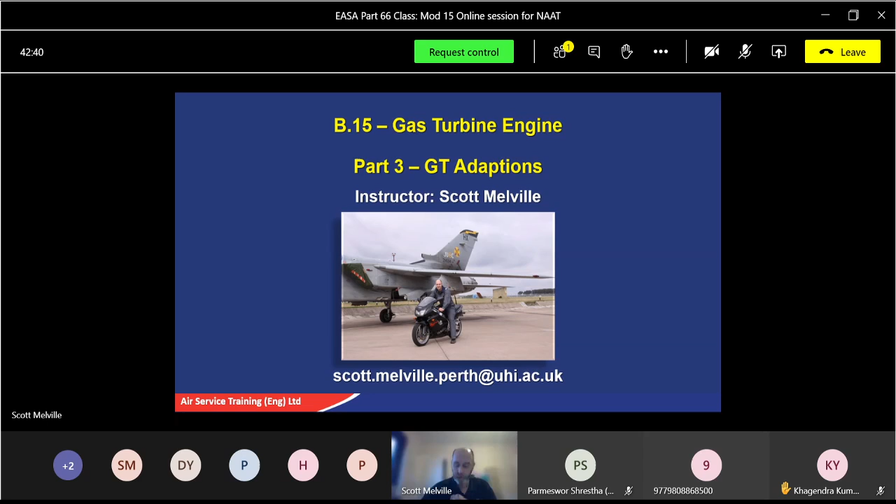I don't need that anymore, we've done all those, that's just the normal start. Right, contents - what we're looking at more in depth is turboprop engines, general gas turbine engine control, overspeed safety devices, turbo shaft engines, which are pretty much similar to turboprops, and reduction gearing.

Again, we've touched on this already in module 17, so it's a bit of a recap - we're sort of going back the way now, so some of this will be a bit more of what we've seen already. Helicopter control systems - why are we teaching helicopter control systems? Well, most of them have gas turbine engines, so you need to know a little bit of the basics about helicopter control systems.

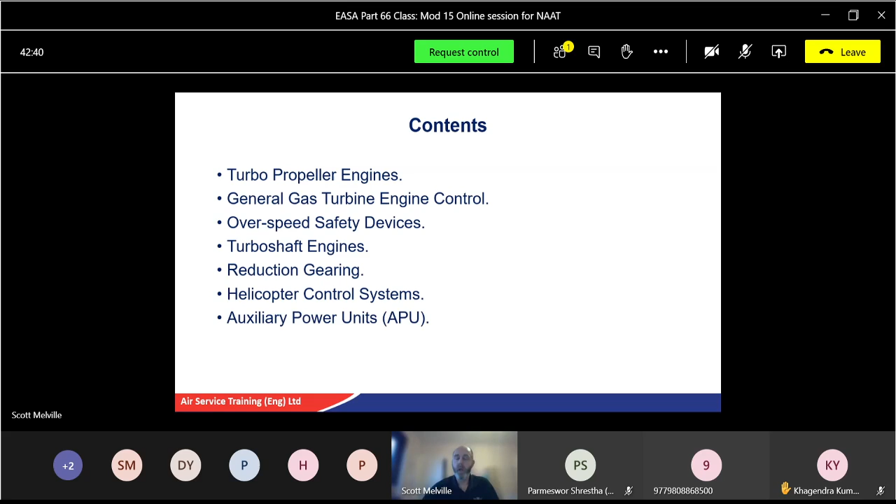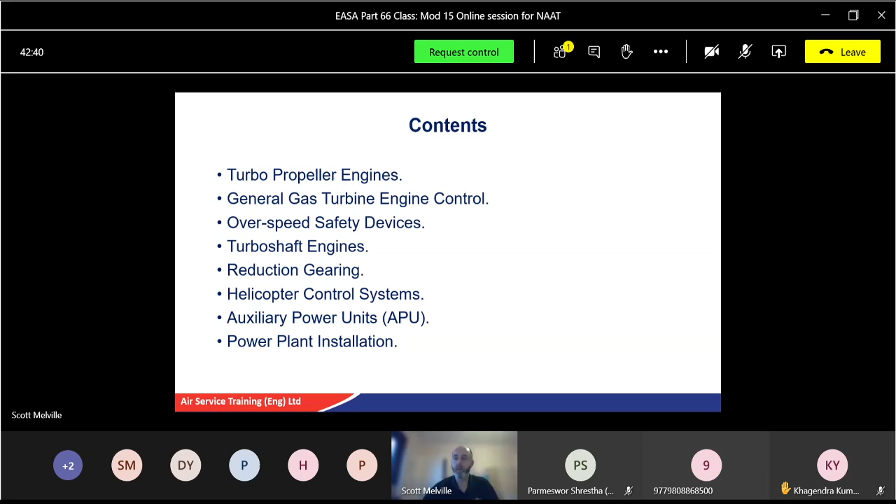APUs, I mentioned these quite a few times, but we're going to look at them more in depth. What are they? They're just a very small gas turbine engine, that's all they are. Power plant installation, flexible pipes, and a few bits and pieces thrown in between.

So let's start off with the good old turboprop aircraft. Basically, what is it? It's a gas turbine engine with a big propeller stuck in the front.

So what was the comparison between that and the jet engine, reference how much air? Was it a small amount of air, high velocity, a large amount of air, large velocity, or large amount of air, small velocity? Large amount of air, small velocity - yeah, that's pretty much it. So this poor little engine's got to work a little bit harder to get the power.

Hence, remember, you can see here in this example we've got 1, 2, 3 stages of turbine. So remember, a turboprop engine tends to have more stages of turbine rotors to extract more energy to spin this big propeller. Okay, so we'll look at it a bit more in depth.

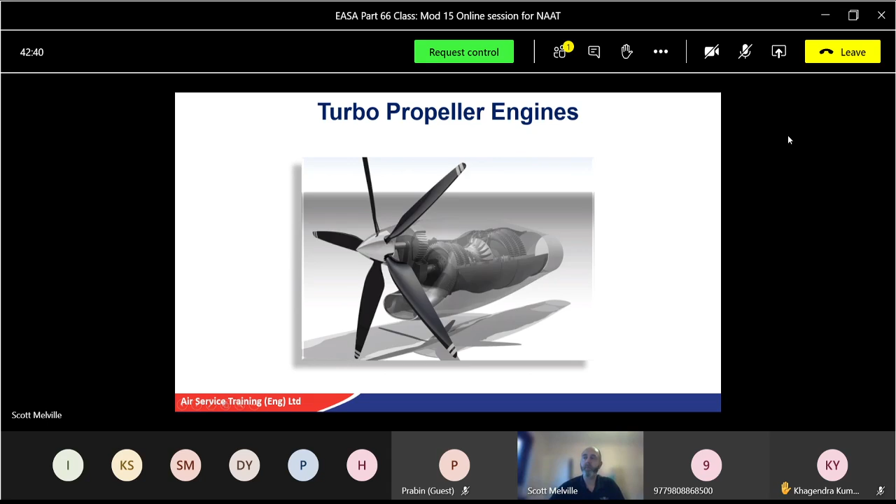So turboprop engines broadly split into 2 categories. You'll have, as we mentioned already, just a bit of recap, direct drive fixed turbine, and your free power turbine. Remember, the direct drive one is mechanically coupled to your HP spool, whereas your free turbine is just a shaft, a turbine, and a propeller.

So it's free to rotate in its own environment. Yes, there is a reduction gearbox there to reduce the speed of the propeller compared to the turbine speed, but that's the only coupling it has. It isn't mechanically coupled to the engine.

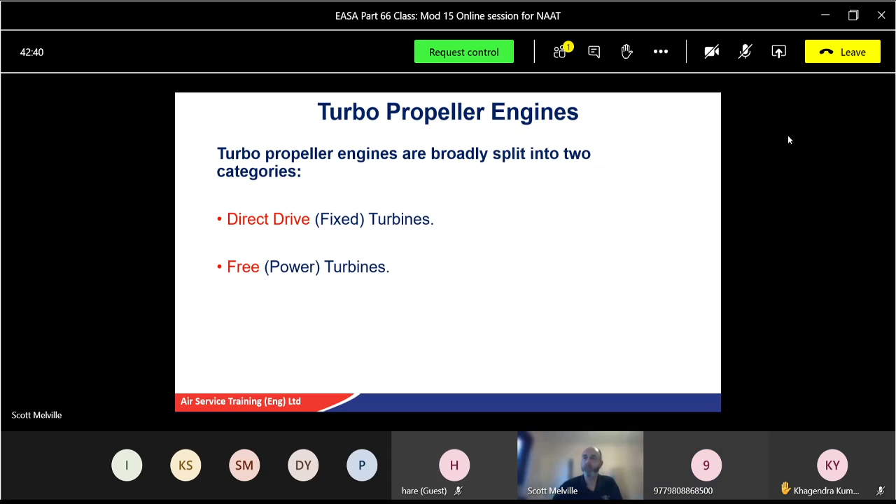So there we go, direct drive, for example. This is like an old Dart engine, like the one we've got in the hangar. It just happens to have 2 centrifugal impellers. So the example here, we've got 2 centrifugal compressors, 1 big shaft, and a few turbine stages at the rear there. So it's just 1 shaft with 2 compressors - just this type of engine. That's just to show you an example.

But the main thing is we have got a reduction gearbox to reduce the propeller speed. Now, on a free turbine, it's the same - we need a reduction gearbox because without one, that propeller will spin far too fast, because the shaft here is going to spin at quite high revolutions. We don't need the propeller to spin as fast because it's a lot bigger. Imagine the tip speed - if that was rotating at the same speed as the shaft, it would just fly off and break into 1,000 pieces.

Okay, and a little thing to take note of here is this little formula at the bottom. We've got shaft horsepower plus jet thrust equals equivalent shaft horsepower, ESHP. So make a note of that, highlight it, because they might ask you what is equivalent shaft horsepower - and that's basically the shaft horsepower plus jet thrust.

We will break down horsepower into 4 components, but for the moment just take note of that, reference direct drive turbines. So equivalent shaft horsepower is the thrust of the engine plus the power from the shaft, the shaft horsepower. Again, we will break this down later, but just for the moment take a small highlight on there. These are in your old books as well, it's still pretty much the same - I can't remember if that's book 2 or book 3 in your old books, maybe book 4 actually.

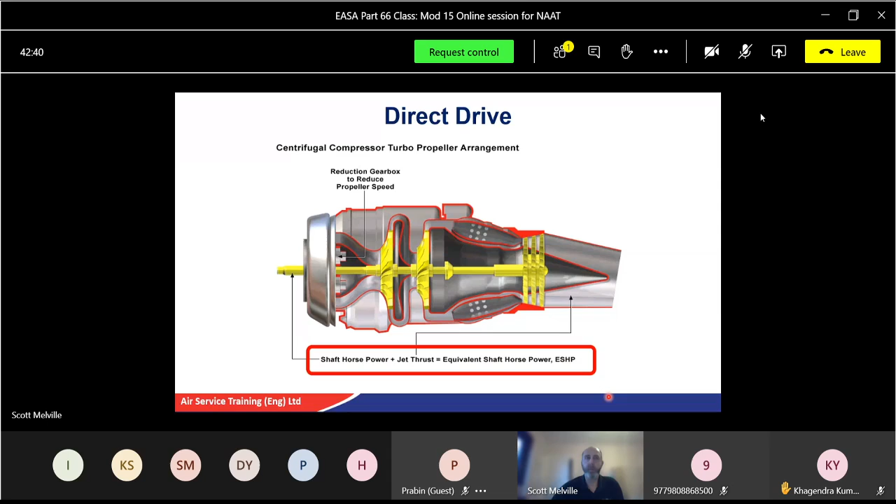Turbine, as I described already - as you can see there, there's a turbine and there's a shaft. This one just shows the shaft coming out towards the back, which will probably join to a gearbox and then go up to a rotor for a helicopter. But likewise, that shaft can go forward and connect to a reduction gearbox and a propeller. The main thing is, it is not mechanically coupled to the main shaft within the engine - it's free to do what it wants. This example is just purely for a helicopter, but the principle is exactly the same.

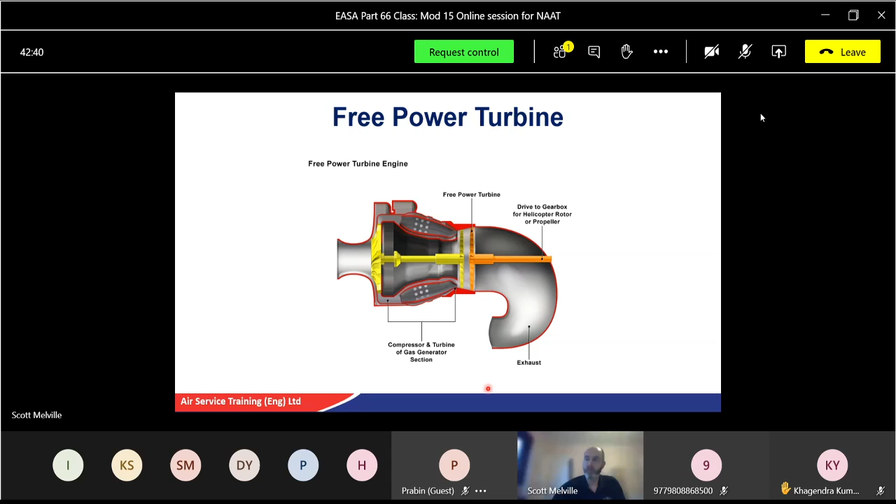Now, gas turbine controls, there are 4 requirements for all control systems, and they must be - this is another acronym you can make up. A for accurate. It has to be accurate in operation. No point in moving forward and then the thing goes backward, it has to be accurate.

So that's A for accurate in operation. If we select something on, it must be on, it doesn't go off. Next one is P for positive - positive in selection. So when we move a switch or control, it feels positive. It actually goes where we tell it to go. We switch the switch on, we feel the click. We move the throttle forward to maximum, it moves to maximum.

So A for accurate, P for positive. Next one is R for reliable. It has to be reliable under all conditions in flight. No use going straight and level and that's it - when we're turning, pitching up, pitching down, it's got to be reliable under all conditions, doing what it's designed to do.

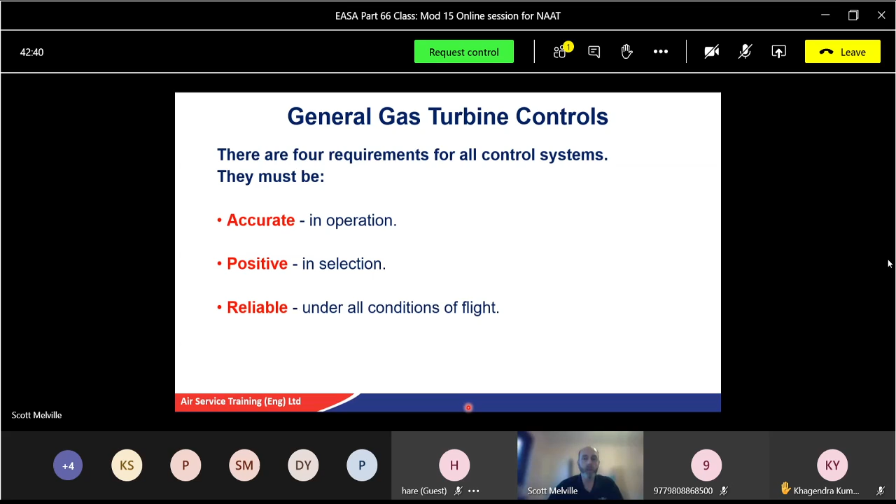And the last one is E - effective, regardless of the distance between the flight deck or cockpit and where the engine is. The reason we mention that is because aircraft are different sizes. Some are quite huge, so the cockpit to engine distance can be large. With a small aircraft it's quite close. In olden days, throttles were connected by cables, pulleys, turnbuckles, rods, etc. It doesn't matter the distance - when you move that from idle to forward, it should be effective.

It doesn't take half an hour to actually move the thing. It doesn't matter the distance - when you move your control or switch, it is effective, regardless of the distance between the cockpit and the actual engine. You can imagine the olden ones with ball bearings, connecting rods - a little bit of wear at one part can be exaggerated by the time it gets down to the engine. That's why when we do rigging, it's important that we take up all the slack and everything is in its correct position.

So that's your 4 main requirements for all control systems: A, P, R, E - accurate, positive, reliable, effective. We'll go over that a few times with revision. Accurate in operation, positive in selection, reliable under all conditions in flight, and effective - it doesn't matter what the distance is, it's got to be effective. That's a good one to highlight - a good chance we'll get an exam question on maybe 2 of those. They might give you a couple as an example and you have to fill in the rest, so definitely know those ones.

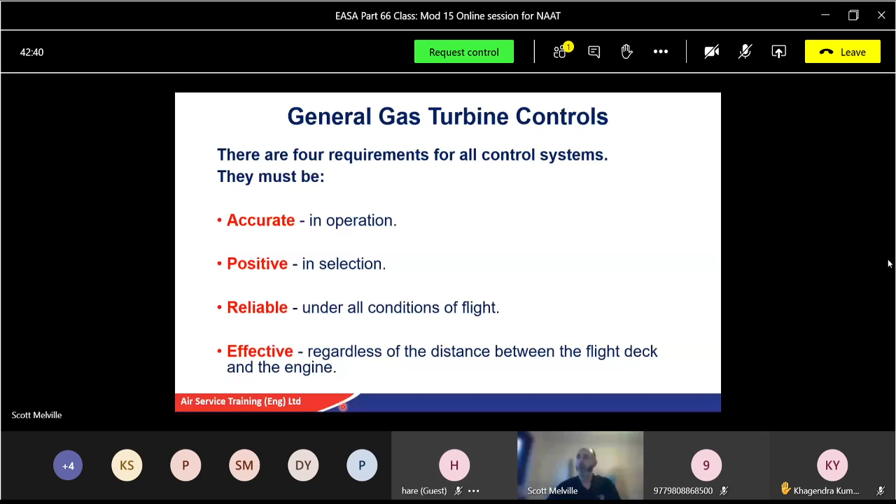Okay, we've got a few levers and controls we'll look at. I'll just get my picture up - I was going to try and show you. Where's it gone? Bear with me. Right, sorry.

Okay, it's working now. So in your levers we saw already, this shows an example of a twin engine setup - you've got your left throttle, right throttle, and rollover levers here. Things you might see include thrust reverse, parking brake lights, parking brake levers, landing gear selection, trim, flaps, and all sorts of things. Doesn't matter what the control is, it's got to be able to actually work. Again, this is all on the quadrant, the middle part within the actual aircraft cockpit itself.

A lot of these connections, the older ones as I said before, may not be fly-by-wire. The new ones are fly-by-wire, but a lot are still cables, rods, pulleys, teleflex cable, Bowden cable. We'll come across those depending on the aircraft type. Main cockpit separate lever selection, like thrust reverse - again we need positive selection, so we'll go back to your main APRE scenario. It's got to do what it does, irrespective of the distance, and be positive.

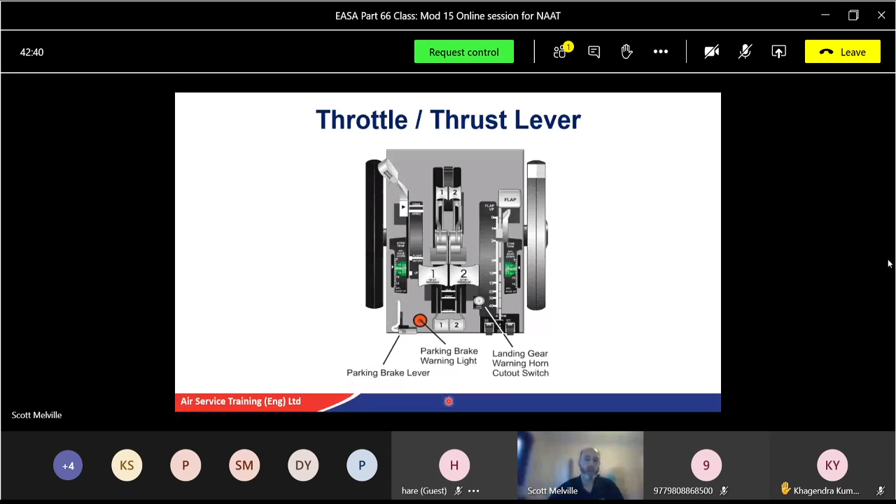So main levers we'll look at controls - HP cock, start lever, and the LP cock. Mentioned these already, it's just a bit of recap. So the HPSOV, your high pressure shutoff valve in the engine fuel system, switches the fuel on at the engine, not before, but at the engine. So before you open your throttles, you need to open the HP lever - that will allow fuel to flow ready for selection to your burners.

And it might have 3 positions. You have fuel cutoff, start position, there's a prime effect, and a run position. So basically normally just 2, on and off, but it might have 3: fuel shut off, cut off, start, and run. Depends on the aircraft itself.

LP cock, again we'll come on to that in a minute. What we meant before was LP cock supplies the fuel from the aircraft side via your ball cock, which is a 90-degree turn valve. That's always left on, apart from the two occasions mentioned before: emergency and maintenance.

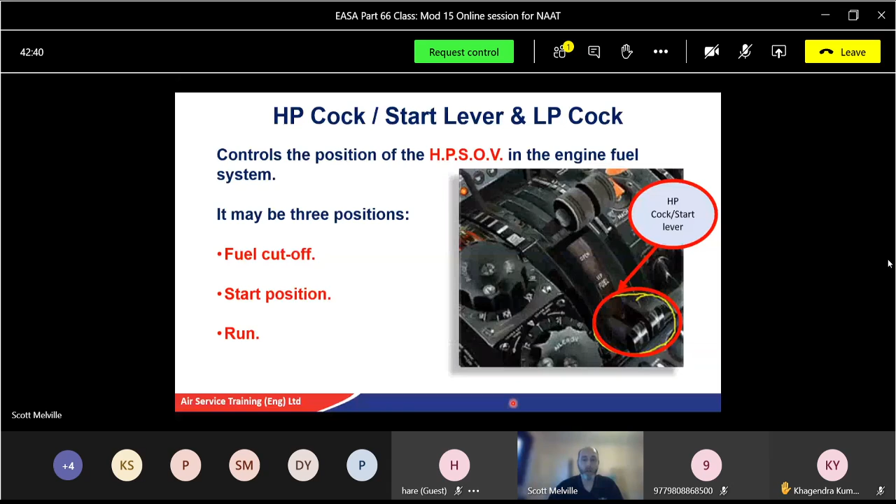Within the levers, your throttle levers, integrated throttle levers and that sort of thing, you might have your thrust reverse. Some are rollover levers like we saw already, some are integrated, some are single operation, some are double. It all depends on the aircraft. That's just showing you a diagram of positions of rollover levers. Don't worry too much about that one for the moment, just a basic insight, not the best diagram, but there's a better one like you saw already.

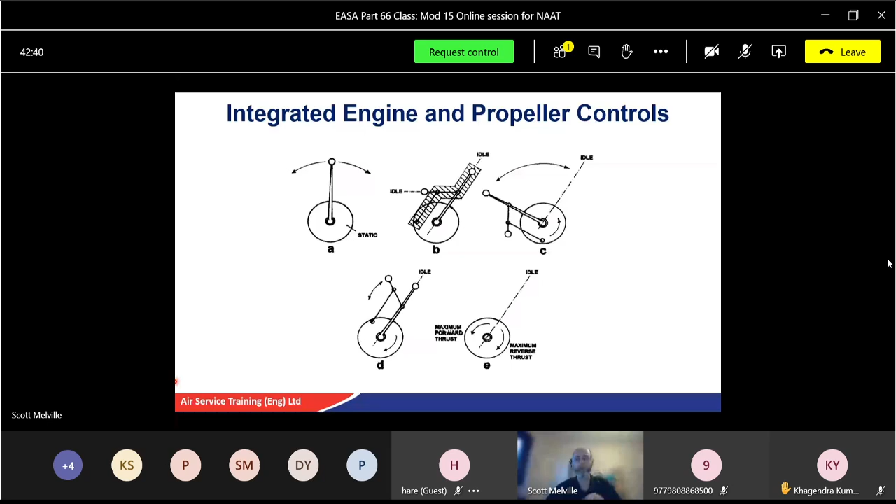We've got selection there, so we can bring an integrated throttle lever, connect to your propeller control lever, come back to idle, and then we get a positive selection - we feel a click - comes back down into the beta range and back into your plus 20 to minus 20 degrees for throttle.

This is the sort of version you might come across, not in this one, but certainly on different aircraft. This diagram shows you the position of the cam track. Let me double check - have we got it for forward? No, that's the size of the one I've got at the moment. What I'll do is try to enlarge that photograph for you to make it a bit easier to see, just in a minute.

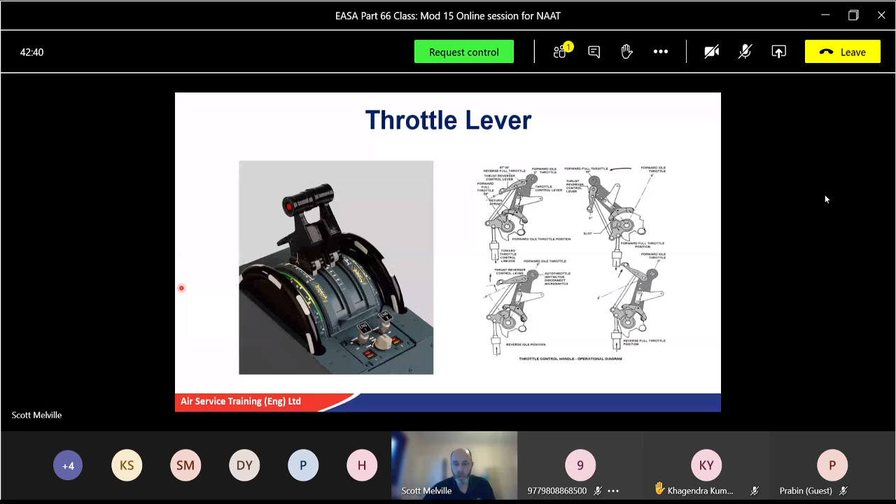So what I'm going to do is enlarge this diagram. Just bear with me two seconds, I can get to work - just make it a little bit bigger for you to see. Leave this one out of the way at the moment.

Maybe that'll make it a bit easier. I'll lift it up a bit more, bring it down. I'll come to the bottom bit in a minute. Let's move this out of the way, I hope that's a bit easier to see.

You can see here, it's like a seesaw. There's a little pivot point here. So during normal throttle movement, this bar stays where it is. The throttle moves up and down the hill, if you want to call it that. Because there's an indentation or cutout, this rocking lever can actually locate into there.

So when we lift up the thrust reverse lever, that engages the front part, lifts it up, and locks it in there, so now we can push the whole throttle forward. When we're in full throttle position, we can't select thrust reverse, because if I try to lift that lever up, it can't pivot this lever here. There's no indentation, so it can only go into this hole once it's back at idle.

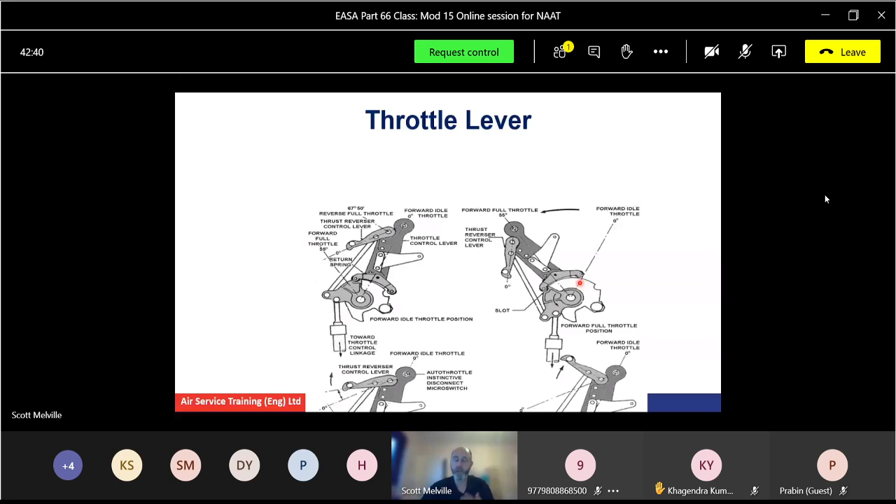Let's move this up a bit more to the next part. So in the reverse idle position, you see it is in location. We can lift the throttle up, it will engage, and then we can move the whole throttle assembly, because that has now engaged in the throttle assembly itself. So it is free to actually move the throttle. We can move it into 50% range if required.

I'd like to get an animation for that. It's a bit dry, unfortunately. I'll come back to that one further.

So turboprops, single lever control. Yeah, it takes a lot of load off the pilot. So turboprop engines of direct drive or a fixed turbine type will be fitted with a single power lever. This power lever is actually connected to the propeller control unit. So instead of having two separate levers for your engine power and your propeller control, this one does it all for you, so it takes the load off the pilot. Both the fuel control unit on the engine and the propeller control unit, your PCU, are interconnected by one simple throttle.

This one has obviously got two engines, so just by using one engine throttle, it's connected to your propeller control unit, which controls the angle or pitch of the blade to control the speed of the engine. Remember, if the engine's going too fast, the propeller control unit will coarsen off the blade to cause more drag in effect, which will slow the engine down. So they both work together, nice and easy, one lever, one action.

So it tends to be for a fixed turbine one now. Control connection with the HP cock also ensures that the fuel flow to the burners is shut off before the propeller is feathered. Basically you pull this lever back, shuts the fuel off, and then once the fuel's shut off, then that's great, then it will go into the feather position. There's no point going into the feather position before shutting fuel off, because that means it's going to slow down too much, and if you've still got fuel going in, there's potential for an engine fire. So we must make sure we shut the fuel off first before we go into a standard feather position.

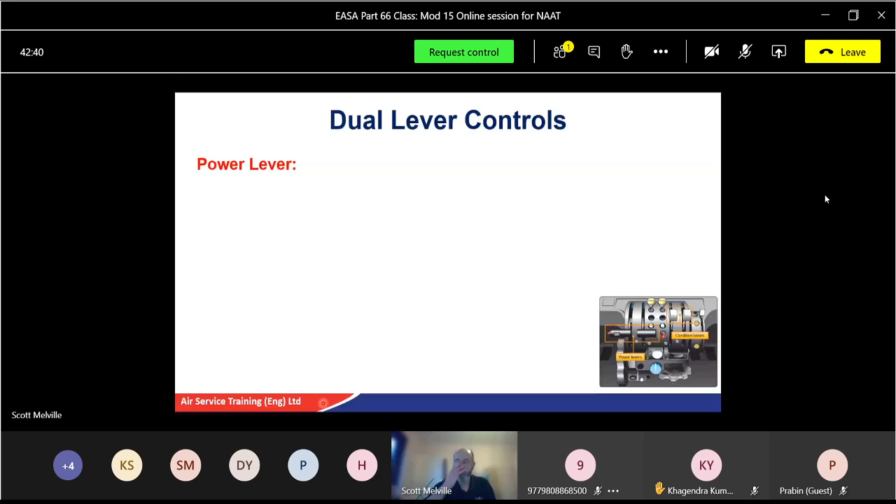So a power lever schedules fuel flow from idle to takeoff, arranged by positioning the operating lever on the fuel control unit, the FCU. When you bring it backward, rearward selection is made from idle to reverse, which schedules not only the fuel but also the blade angle, from +20 degrees to -20, just like we saw in module 17. So we're recapping what you've been taught before module 17. All right, so that's your power lever. Again, remember that range is also called the beta range.

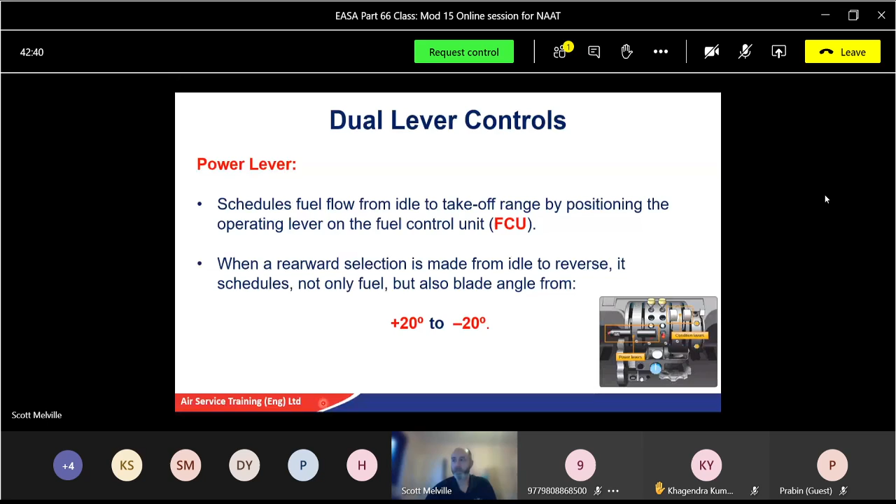Your PCL, your prop control lever, also known as your condition lever, is connected directly to the PCU and selects the required RPM by applying or releasing pressure on the governor control spring. Remember, back in Module 17, the governor will go up or down accordingly, which will increase or decrease the pitch, depending on whether it's a single acting or double acting propeller. Single acting had a big spring and oil pressure on one side, and double acting had oil pressure on both sides. So it depends on the system. The governor will control that - remember on speed, under speed, and that sort of thing we spoke about in Module 17.

It operates when the propeller is in the normal constant speed range, but does not influence propeller blade angle while the propeller is operating through the beta range. That's controlled by the power lever.

Feathering, fuel shutoff is selected by moving this control through the rear. So what you're going to do is move your power lever back to idle, and then bring your condition levers back, and that will shut the fuel off.

Safety devices - we've got various types of safety devices for overspeeding: automatic and mechanical. We already know about the mechanical side, some of the governors and that sort of thing. This is a different type of governor.

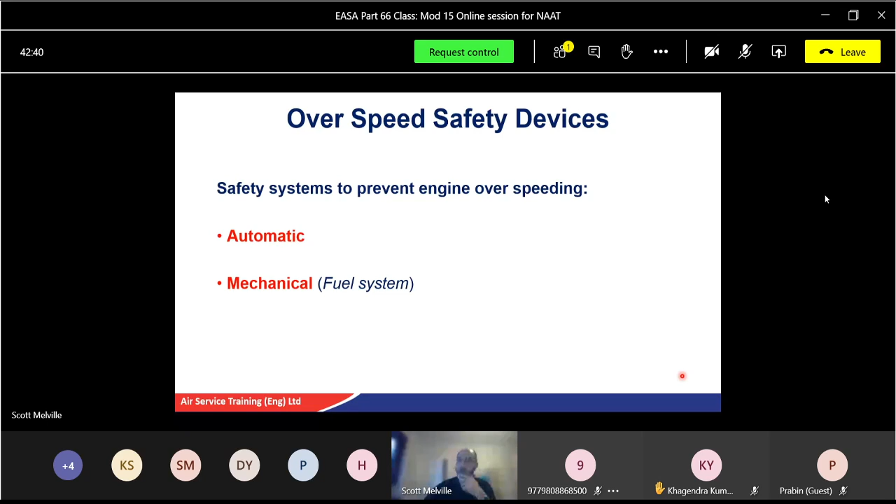If my animation works right, it'll give you an idea of how this operates. As we mentioned in Module 17, you have a drive shaft. The faster the gearbox is going, the faster these weights fly round, and the faster they fly out, the more these tip down - remember, they look like birds' beaks. The weight flies out, which pushes this down. If that pushes down, it restricts the servo flow, the servo outlet, which will decrease the amount of fuel pressure.

There we go, there's my best animation, I'll try and get it to work for you. So as it goes faster, the weights fly out and push down on the valve, restricting the amount of flow there. So it's going so fast, we need to slow down a little bit - that'll reduce the servo pressure.

That was included - that's an older version, taken from a Dart engine. Nothing too much there.

Electrical - we've got what we call a phonic wheel, where you have a magnet with an electrical sensor on it, and every time a tooth goes past it will induce a pulse, and we end up with what's called a sine wave, as you've seen from Module 3. That pulse is picked up, and the frequency will increase or decrease depending on how fast that gear on the shaft is going round. The faster it's going, the more intense the frequency, and that will be amplified through an amplifier to a signal to your fuel control unit and to your RPM gauge as well. If it gets too fast, it will send a signal to the governor and shut down the fuel supply.

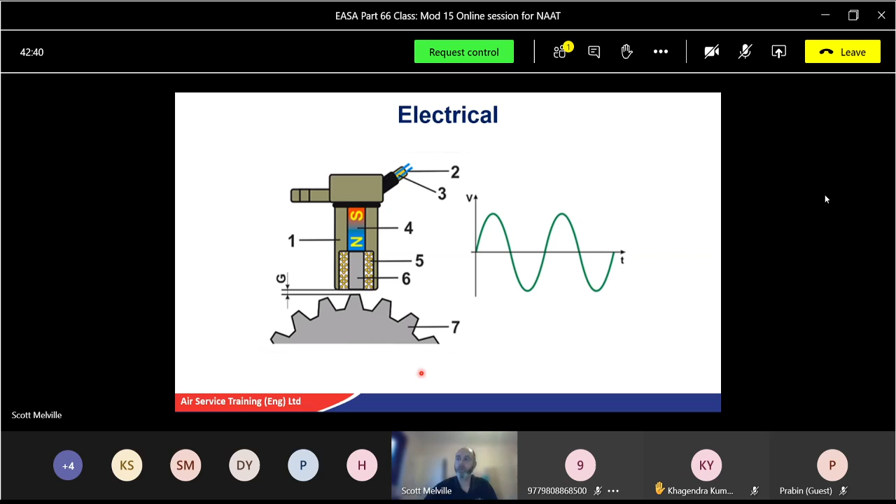The other emergency system we've got is called the LP shaft disconnect system. It's never actually been used, though it's been fitted to many aircraft engines - it's never had to be activated. It's a very simple procedure.

On the LP shaft itself, there's a big nut. Normally that'll be spinning fine, but if that nut or the shaft breaks, that will stop. The nut will continue to turn for approximately three quarters of a turn, and it will push against this lever - we call it a bell crank lever. It's on a pivot here, looks like an L shape, and it will move like that. The nut will spin out, push this lever, which will pull on this cable.

That cable is joined all the way down - here it is in exploded view, running all the way down the side of the engine, inside the engine. Then it comes out of the engine and goes down to your HP cock lever, on the engine side, which will then disconnect your HP SOV.

So it will shut off your basic HP cock on your engine. It doesn't matter what the pilot does in the cockpit with the HP cock, it will mechanically have disconnected here, and that will be it. It will shut the fuel off.

Again, this is on an old Spey engine. There are various different engines that have them, and as far as I'm aware, it's never had to be activated. They've never had a broken spool, which is quite good.

Just a simple cable all the way down through a couple of pulleys, and eventually to a split system. This lever here is on like a little ball, so it cracks open - you can see the little ball in here. A little pin will crack open, split the lever, and it will stay in that position until it gets reset. So a good automatic mechanical thing.

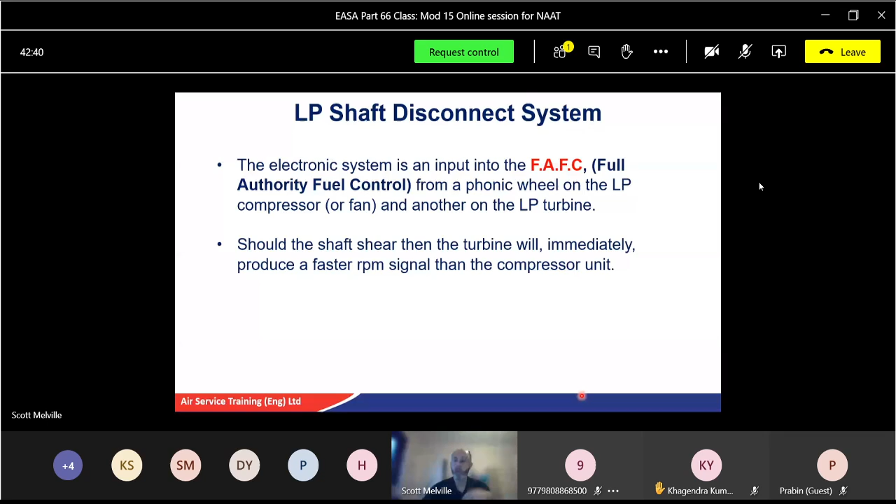If the shaft shears, then the turbine will immediately produce a faster RPM signal than it would at the front and the compressor unit, so you get a different signal. The FAFC will recognise that difference and operate what's called your PRSODV - your pressure raising shut-off and dump valve - and that will shut down the engine.

So slightly different on the FAFC version compared to the mechanical version. But the main thing is, it does the same job.

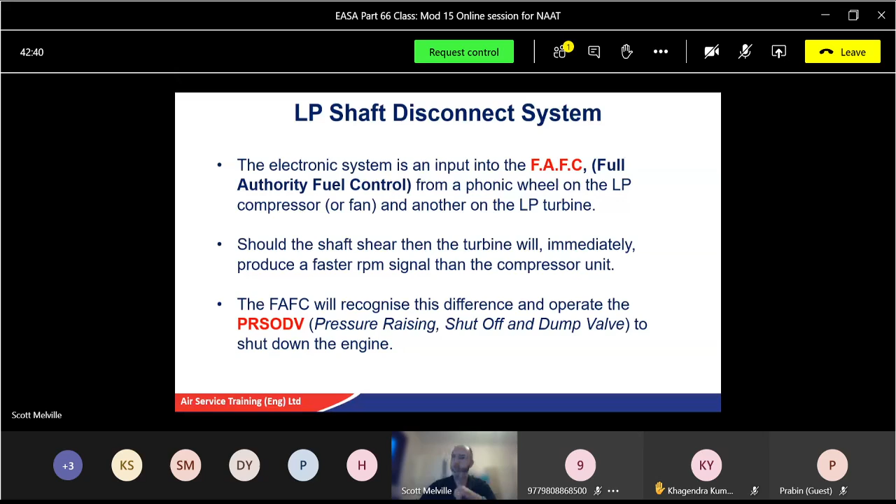Okay, just a mechanical version. And likewise, with the electrical version, we had the FAFC control looking at phonic wheel type sensors. We'll cover phonic wheels a bit more in depth later on.

Last part of the day I'm going to look at is how we join shafts together, like turbines to the shaft to the compressors, and so on. So I'm looking at 3 types of common couplings used within gas turbines. The first one is a curvic coupling, the second one is called a gimbal, and the third one is called splined. I'll show you some examples of each of those - three ones you want to remember: curvic, gimbal, and splined.

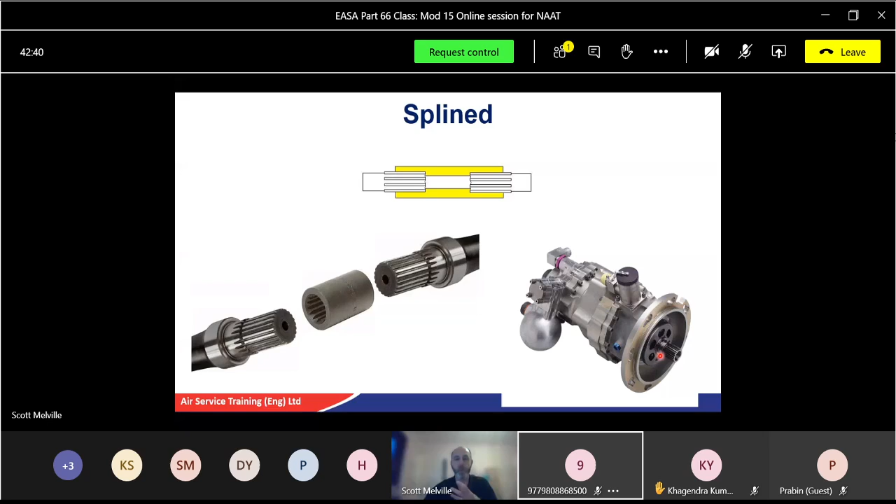The anti-vibration, we've done that one. The gimbal, again, power takeoff shaft. You might see these in farm type tractors. Tractors have them for their ploughs and whatever else. Anything that has a rotation on it, you might have seen those sort of things as well.

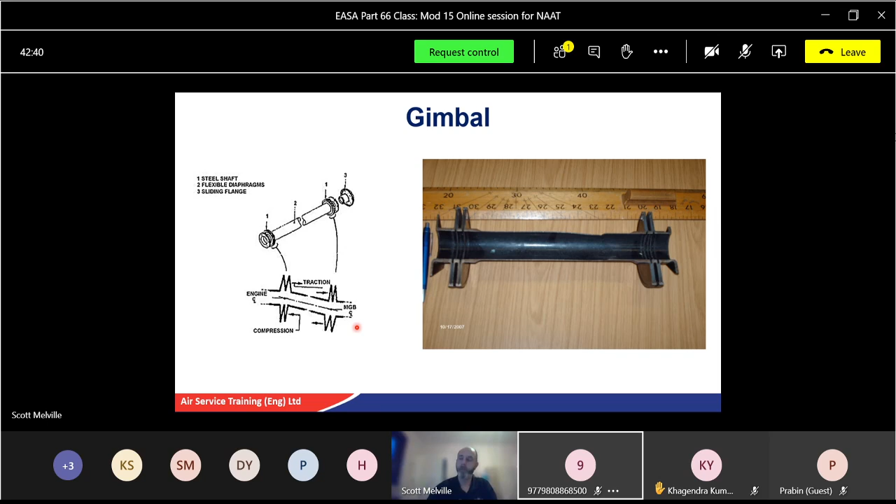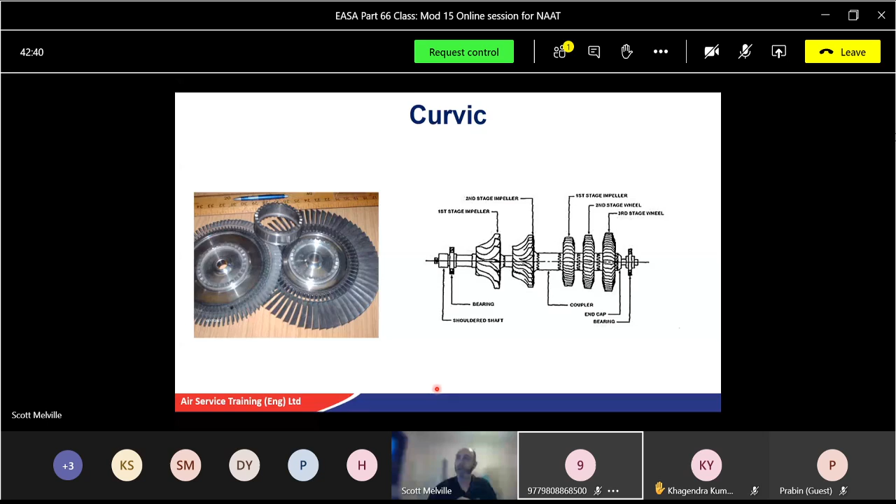But as I say, just a set of mated teeth, squashed together, interconnecting, and it's a nut at the end of the shaft that holds it together. Nothing drastic there. There's your three: curvic, gimbal, and splined.

So, going back then, we had the mechanical and electrical method of LP disconnect system. How did the electrical one work? Anybody? What was the basic principle behind the electric one? Phonic wheel? Yeah, phonic wheel, yeah.

So the turbine and the compressor are spinning obviously together on the shaft, but if that shaft breaks, then the turbine's going to go faster than the compressor. So by the difference in the wheel position, the FAFC will recognize this and go, that's not right, something's wrong. They should be together at the same time. That will shut the fuel off through what was called your PRSODV.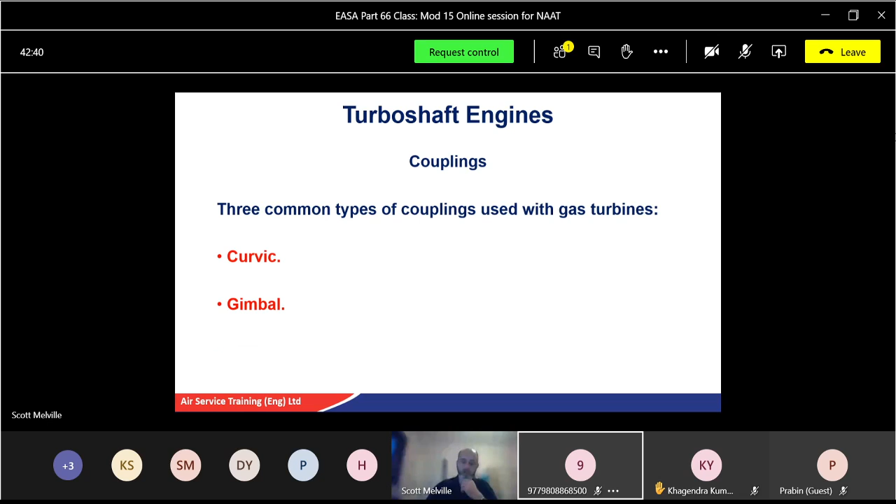Okay, the mechanical version, go back to the diagram. Simple lever on a nut on the shaft. But should the shaft break, it will go quicker. It will disengage by three-quarters of a turn. It'll push on a lever, which is called a bell crank, that will pull the lever, and then that will pull the shut-off valve relay on that arm there.

That connection will go to the cockpit for the HP cock in the cockpit. That lever goes to the actual shut-off valve on the engine. That will actually disconnect when the cable pulls it. So it doesn't matter what the pilot does, it will not open it. In all my career I worked on those, it never got activated once. They never had a broken shaft. So it was very well designed.

What was the other mechanical type overspeed protection system we've got, which we covered in the fuel system? Governor control. Yeah, governor control. We'll go back to that one. There's that one. So nice and simple.

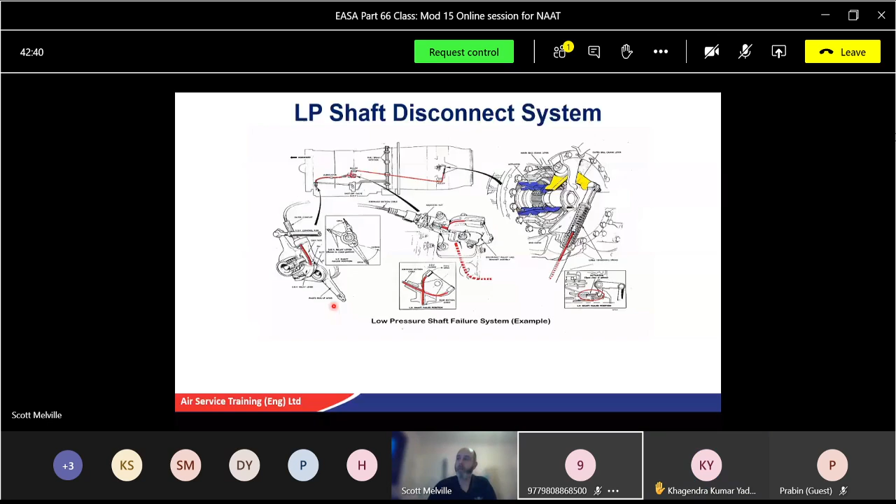It was just a case of the flyweights. As the flyweights there, these ones here look like a bird's head. As they get more centrifugal force, the force going faster spins them out. So as these weights here at the bottom fly out the way, then the top of them comes down, pushes down on the valve, and the valve restricts the servo flow.

So we get a reduced pressure here, which means reduced output on the pump. And then when it all settles down, when it slows down, the spring pressure here will push that back up in accordance with the heads coming back to normal position with less centrifugal force, which will bring the valve up and allow servo.

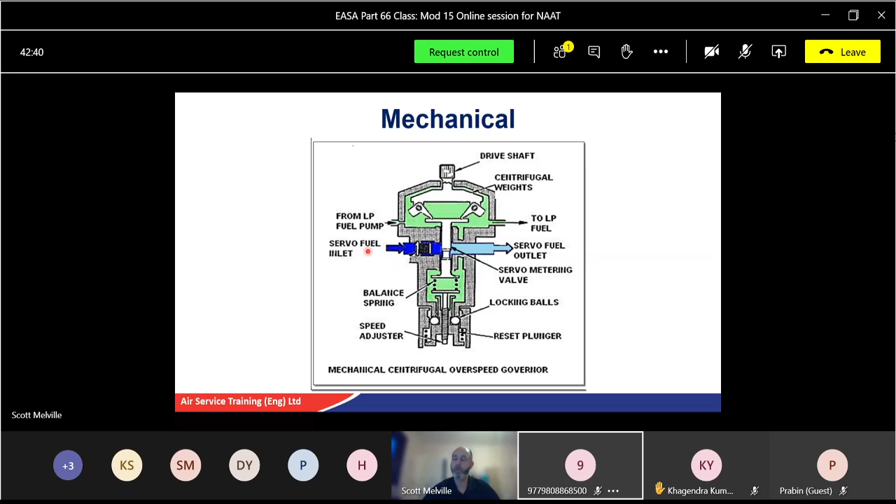Fixed turbine or free turbine? Dual lever controls with fixed turbine props or free turbine props usually. Free turbine, yeah, free turbine. So we've got your power levers. We'll go back to the big diagram.

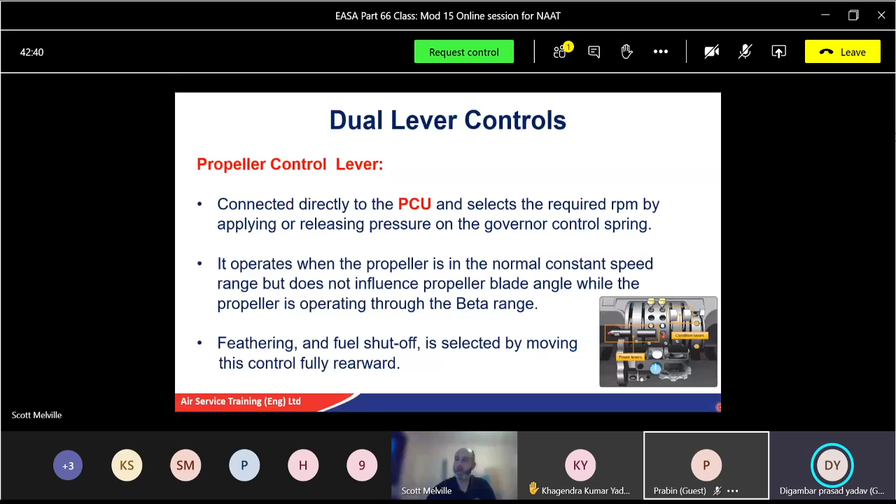So your power lever is for your engine control, and also your reverse thrust range, your beta range. Then your propeller control levers, sometimes called condition levers, will also, once it's in the normal constant speed range, control the pitch of the blades for coarse or fine. But you can also shut the engine down. So we bring these to idle, and then bring these back through a gate that will shut down the fuel as well. It always shuts the fuel off first, before it goes into the feather position, because we don't want fuel in the combustion chamber and then start spinning the propeller when it's in the feather position.

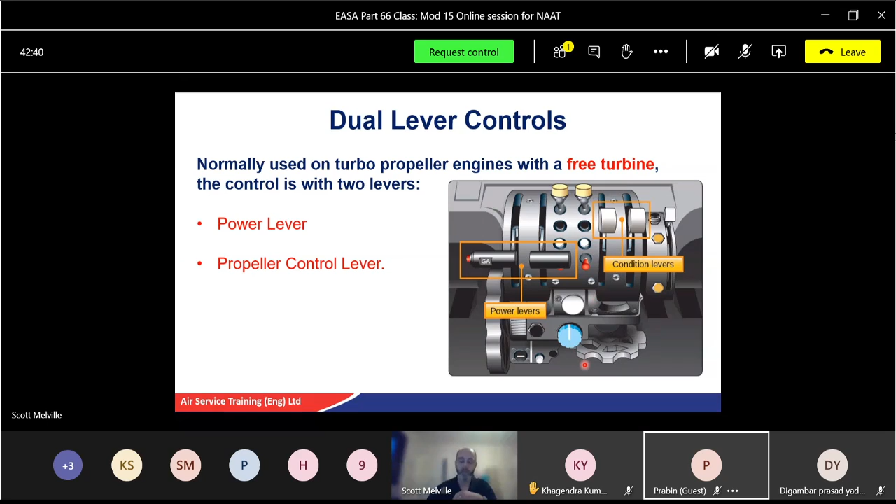So before that, with the single control, single lever, that tends to be on the fixed turbine, while the dual one was on the free turbine. So the single lever, that was interconnected with what other control? The FCU and also, what was it connected to? So one lever did both things, unlike the dual lever one. So what was that? FCU and PCU, yeah, propeller control unit. Like on the free turbine one, you've got individual movement, but on a fixed turbine, you want direct control, so it takes load off the pilot as well.

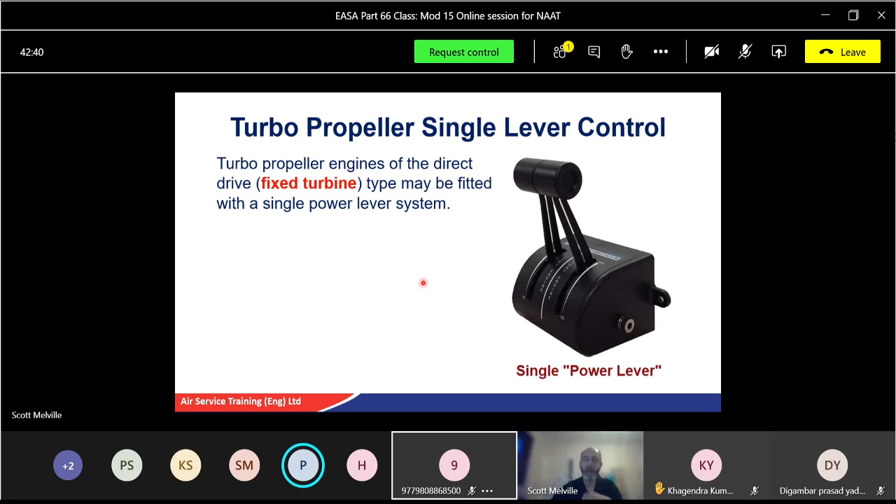Okay, and I'll just move that back down. So that was your reverse thrust. On your throttle levers, again, there's a row of levers. Remember, this cam, this rocking arm, can only be activated when the lever is back at idle, because of the indent in the back. So the little cam can roll into there, which allows the lever to be lifted up. Anywhere above idle, you physically cannot lift the lever up, because the rocking arm cannot sit into that gap at the back. So once you're at idle, physically, yes, you can. And once you lock in position, you can roll it over, that locks it down, and then you can push the forward thrust assembly up to about 50%, increasing reverse thrust. So nothing too bad there.

If you're in beta control, just to recap on module 17 a little bit, going into the beta range, the reduction unit gives oil pressure to find the blade below flight fine position, where it'll go into ground fine position, and then further decreasing angle as required for reverse thrust. We'll go through the ground fine bits. So flight fine, ground fine, beta range, again like we saw in module 17. The two examples I've got in the book are Boeing, which adopts a rotating cam, where Airbus has got a simple rocker method, like the one we saw in the diagram there. Again, they're just examples, we don't take them word for word, but the main thing is it can only be activated when it is at idle.

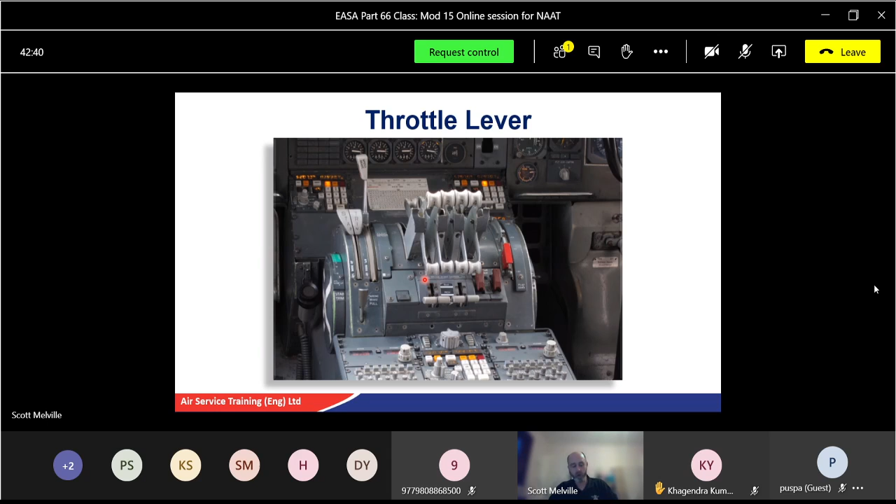Okay, let's double check if there's anything else we could go through before we finish. We've covered most of that - single lever, dual lever, yeah, you're all good with beta range, not a problem at all. And as I said before, we can have control locks on the quadrant to help prevent control flutter or vibration, and control creep, just in case - especially if there's wind, or if you've got a fixed turbine, it can vibrate, so we need to stop controls rocking and moving about. All right, that's fine, done as far as good. I'm not going to go any further with that today because that leaves us a good point. Next week on Monday, we'll start off with turbo shaft engines.